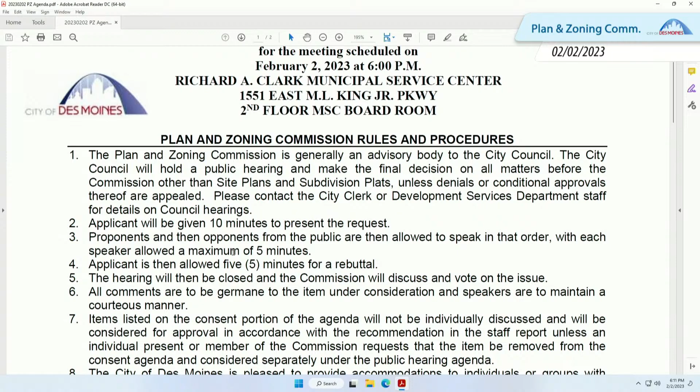Items that are listed on the consent portion of the agenda will not be individually discussed and will be considered for approval in accordance with the recommendations of the staff provided in the staff reports, unless an individual present or a member of the commission requests that the item be removed from the consent agenda and considered separately under the public hearing agenda.

Roll call. Minutes. Can I get a motion to approve the meeting minutes from our last meeting? I'll move. Thanks, Emily. All those in favor, raise your right hand. Any abstentions? Do I have to? All right, the minutes have been approved.

Now we'll go over the consent items on the consent agenda. The first item is a request from Urban Dreams, represented by Isaiah Knox, for the following regarding property located at 1615 2nd Avenue, items A through C. Is there anybody in the public that wishes to hear this item tonight? Anybody in the commission? All right, item 1 will remain on consent.

Item 2 is a request from Hubbell Realty Company, represented by Steve Moseley, for review and approval of the preliminary plat Woodmont on 171 acres of property in the vicinity of 4425 East Douglas Avenue, which would allow for development of 489 one-household residential lots. The property is owned by Darlene A. Feeney. Is there anybody in the public that wishes to hear this item tonight?

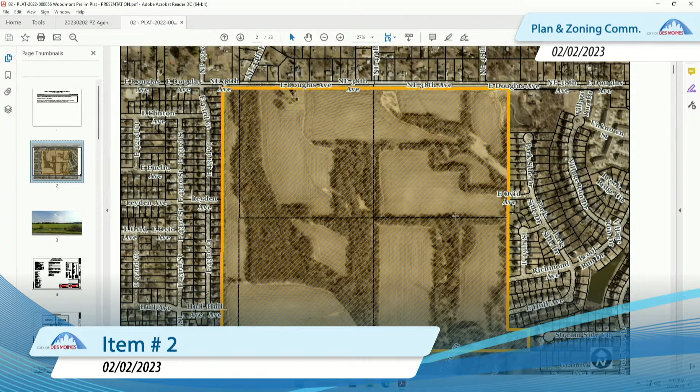This is the area, the subject property. The plat that we are looking at excludes the northern portion of the area that you see here. That's where the townhomes are expected to go, and the proposal that you're looking at right now, the plat, is for generally the rest of the area.

Again, to orient you, this is East Douglas Avenue, on the northeastern corner of the city. This is a huge area, roughly 171 acres, just to give you a scale.

Going back to the map here, most of the adjacent uses are either agricultural or low-density residential to the north. To the east is the Brook Run PUD. To the south, there is agricultural and one household residential, as well as to the west.

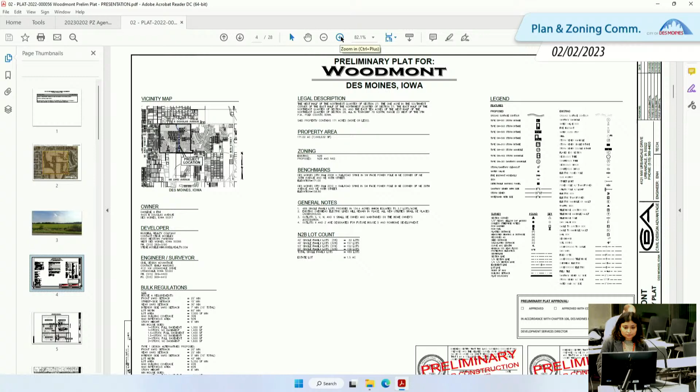I'll try to summarize here, and then we can come to specific questions about various portions within the plat. Let me zoom in a little bit. You can see there's a variety of different single-family household lots proposed. These are the lot sizes, for a total of 489 lots.

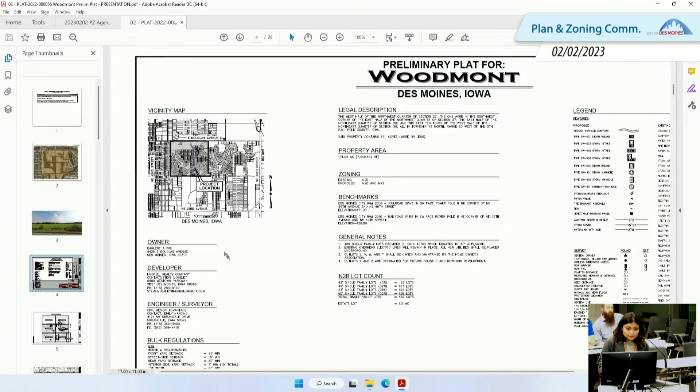This is generally the street layout and the subdivision of the properties. These are the various sheets, and we can come back to this if you have specific questions about the various areas.

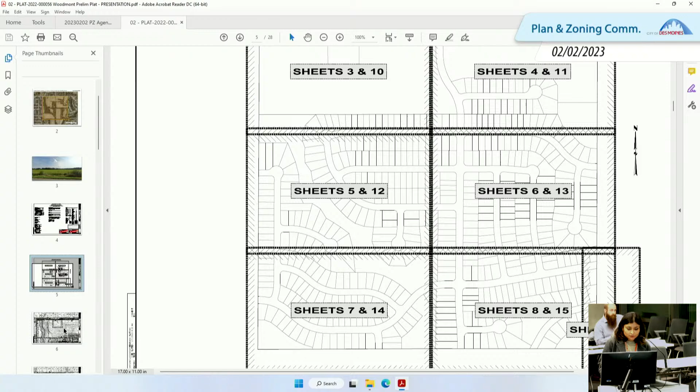As I mentioned before, to the north fronting East Douglas Avenue is Outlot Z, for the future townhomes. The Outlot X to the east is also for the townhomes. This is not what we are considering in the preliminary plat for today.

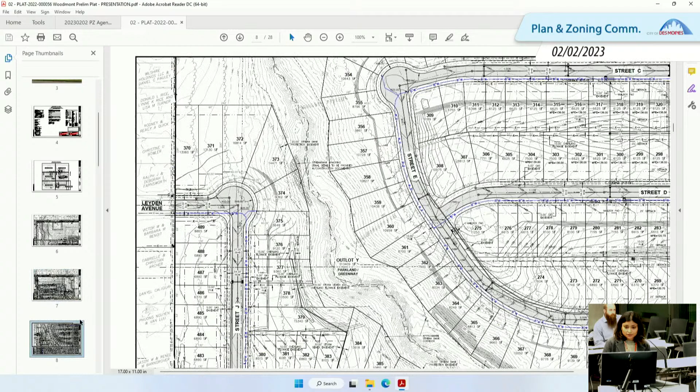It's the area to the south. Moving further, I might scroll down to the large-scale development plan, which will give us a better idea of the overall layout.

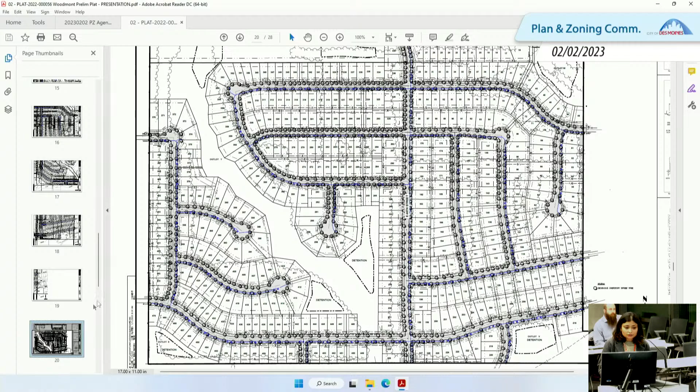So you can see the street alignment. This is Hull Avenue down here. Let me zoom in a little bit. There's a north-south connection roughly running through the middle of the site.

I think this map is actually a little bit easier to follow. As you can see here, to the north we have the townhomes, which went through rezoning and have been zoned to NX2. The area to the south, the single-family preliminary plat we're looking at, is zoned N2B.

The black dash line that you can see provides future trail connectivity, both from the townhome area as well as from the single-family residential area.

There's detention, a few different detention locations proposed. There's one right here, and again one here to the east, and then a few more to the south. The wooded area you can see right here is an outlot, mostly open parkland running along the water channel.

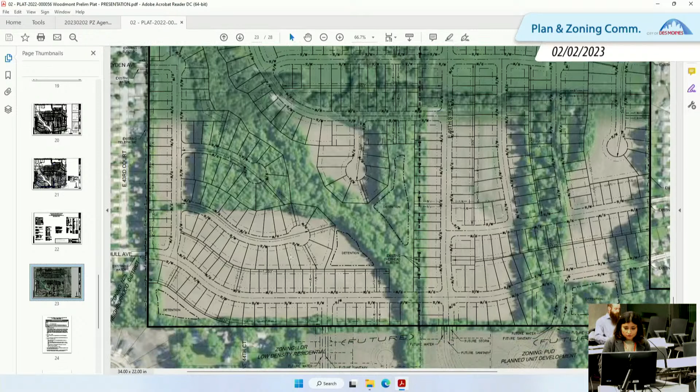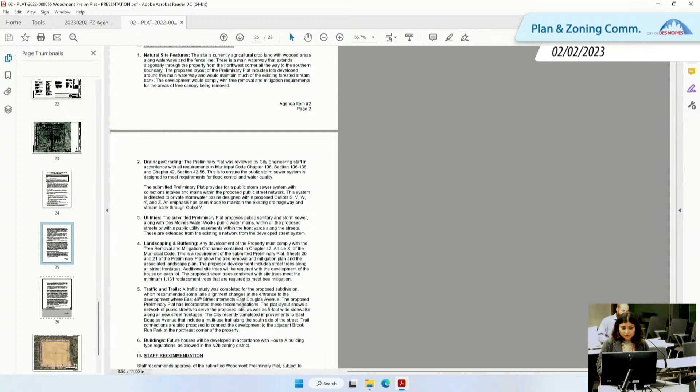With that, and the relevant zoning history I already mentioned, the northern portion of the property was rezoned to NX2 to allow the development of the townhomes. There are a few additional applicable items listed relating to drainage, utilities, landscaping, traffic, and building.

Staff is recommending approval of the preliminary plat subject to all the administrative comments.

This is the consent map. We did not receive any comments back.

And with that, that concludes my presentation. If you want me to scroll over to any of the maps, I'd be happy to do that and take any questions.

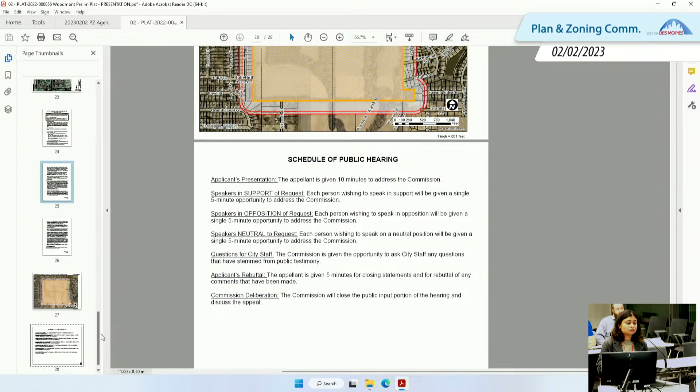Thank you, Suriyoshi. Any questions for staff? Is the applicant present?

You have 10 minutes. Please state your name and address and sign in when you're done. I will try and keep it much shorter than 10 minutes. Good evening, Caleb Smith. I'm Vice President of Land Development at Hubbell Realty Company.

Is that better? Okay, perfect. I don't have a whole lot to add. We've been working well with staff over the past couple months on this project, have made changes to try and accommodate some of their desires and some of our desires, and I think we've come to a really good project. We're really excited to get going. We are also working on our first plat, our first set of CDs. That'll be that first cul-de-sac, if you remember, that was up there underneath the townhome ground. So hopefully soon we'll have some development going out there this year, assuming that we get your guys' blessing tonight.

I'm happy to answer any questions if you have any. Yes, sir. How are you going to handle the tree cover?

As we were planning this development, obviously there's significant tree cover in through a lot of these areas. Some of the locations, there's going to be some significant tree removal. In a lot of the areas where there is terrain, drainage, or significant trees, we've tried to plan around it.

As you recall in the development plans, and maybe I can scroll here real quick. Did I miss it? There you go. Thank you.

To make this development work, to accomplish the goals that we had set initially with the rezoning operations that we did on this property, the density we've got is what is needed to make this project work. Again, all the trees we do remove, we will comply with the city's mitigation plan, and we'll be planting new trees to replace those as we go down through the road. But we've made significant efforts to try and maintain as much of that existing canopy as we possibly could on this development.

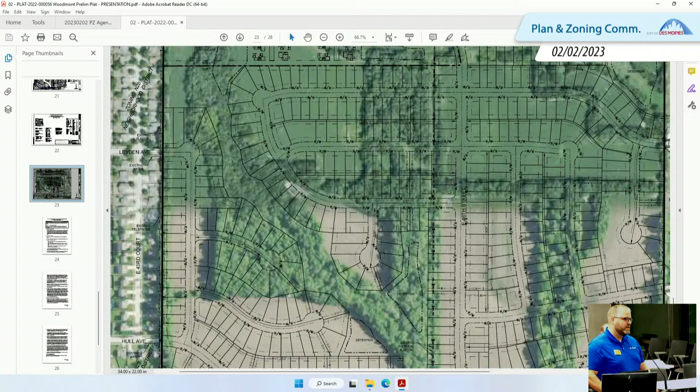What is the expected purchase price of the houses? It's a really good question, only because pricing of materials is difficult to project. In the single-family lots, I'm thinking the lowest end will probably be in the mid-300s, and obviously we'll have some houses that go up into the 400s. A lot of it depends on what customer demand is. Two-story ranches, all those can drive different values. But we're expecting that mid-3s to mid-4s is probably the playground we'll be in on this, at least the first few phases.

What about townhomes? Prices on those? At this point in time, the townhomes isn't in front of the city for approval. Our anticipated range of those are in the upper 2s to the 300 range, but we're still continuing to work on that plan. As we get more details, we'll be happy to share that, and obviously we'll have an application before you for review.

Just to reiterate, members of the audience, you will have your chance to come up to the podium and ask any questions or share your concerns. Just so you know, things that are asked and questions need to be part of the record. That's why we give you 5 minutes so that you can come up and either share that you're in favor of the project or in opposition or neutral.

Hi. Did you develop all of the houses that exist around it, specifically to the east? We did not. Will your finished product look like those, where the garage is prominent in the front? It will be. Inevitably, one of the things we propose with this development is to try and get smaller lots. We're trying to propose the smaller lots because it allows us to produce a product that is going to be more affordable to the average buyer in the market right now. So you will have garages out in the front because of the width of the lots we're proposing.

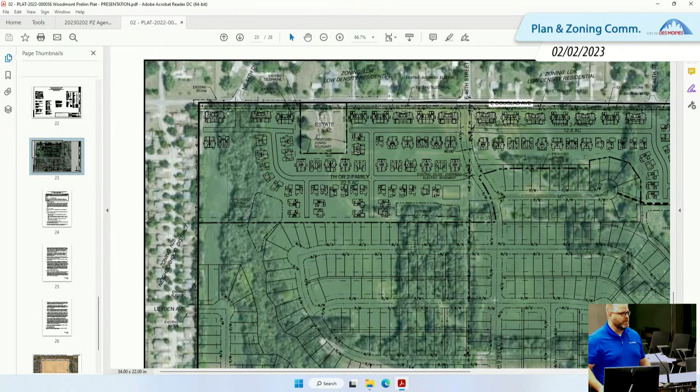Any additional questions from the commission? Any questions for staff? Actually, one.

Do you have a mock-up of what the homes would look like? And then what typical size of home is it? Are they typically like 2-bedroom, 3-bedroom homes?

Usually 3 to 4 bedroom, depending on the footprints we go with. We've got about 8 to 10 product types that we're targeting for this, though I don't have the products with me tonight. One of the things we do is continually evaluate our product and what's working in the market, so that could evolve through the different phases of development. But right now we're looking at about 8 to 10, 3 to 4 bedroom units, some ranch, some 2-story, some with 2-car, some with 3-car garages. So there's some variety out there.

Okay, and then my next question, what's the average size lot? I think I saw a couple 7,500 to like 10,000 square feet. And then how far spaced apart are they? I guess is my next question.

Yeah, so the side setbacks here, we're proposing 5 and 5 for the side setbacks, so they will be closer. Lot sizes do vary. One of the things we've noticed in the market is that if you have a different variety of lot sizes, it allows you to bring different product types, and that seems to hit the market better. Some lots will be smaller in that 7,000 square foot range, some will be 10,000, some will be a little larger than that. In this first phase, I think there's significant variety of all those.

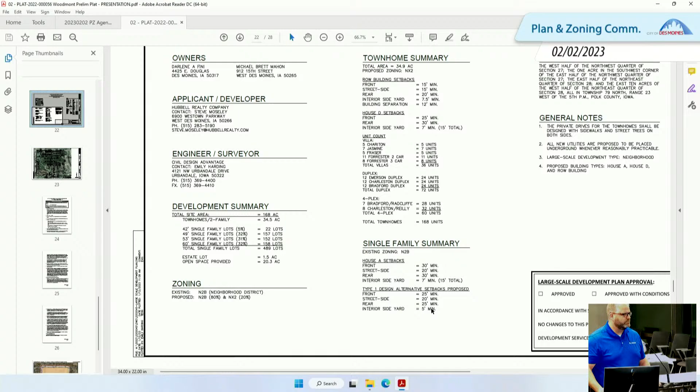Thank you. Quick question for staff, maybe. Embedded in approval of this preliminary plat, have you guys approved those modified setbacks? Yes, we have, through the large-scale development plan, which is the administrative review.

So those setbacks will really come into play when the building permit requests come in for each one of those houses. That's typically when we look at site situations - in an already developed area, if we had an infill house, we might consider relief individually at the building permit phase. But since this is a holistic development, we have the avenue to do the large-scale development plan and start looking at those setbacks early.

Does either staff or the applicant know the difference between the average lot size you're proposing and the average lot size in the development that the speaker raised? I personally don't, I apologize. I don't have those stats with me tonight.

Does staff know? No. I mean, is there a material difference? I'm just trying to look at a couple here, see if I can find a dimension. Yeah, I'm getting on GIS real quick too.

Between Lake and Bull, on my block right now, there are 14 lots, 15 because one homeowner has 2. On the proposed development in Hubbell, there are 19. My lot's maybe a third of an acre, so I'd say between 9,000 and 12,000 square feet. It looks like maybe the lots are in the width range of 60 to 65 feet. Does that sound - well, we can hear you, but nobody else can hear you.

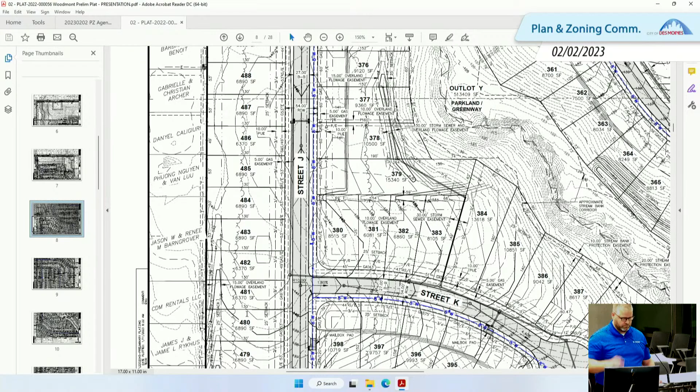Okay, and then I think my last question for the night: I was out in Grimes, and essentially it's a newer development. The houses are very close together. They're not going to be comparable to that. It looks like a really tight street. Yeah, it's hard to say, and I say that because I don't know what development you're specifically talking about.

With 5-foot side setbacks, if you build right up to the envelope, you're going to have 10 feet between the houses. It is kind of tight. There are developments out there where they are even closer than that, and I think they have firewalls in the house that they put in to allow them to be closer. So I don't know if it's one of those situations, or they might have gotten darn close, and it may be that they took the hit on the construction side to get the units even closer.

Okay, sounds good. I think that was my last question. Thank you.

Commission, any other questions for the applicant? If not, then we will close the public hearing and we'll hear your thoughts.

Yeah, can I start, Johnny? So I went to a talk recently about the housing shortage that we're going to be seeing in Des Moines, and I was a little nervous about it when I heard it. So I like projects like this because I feel like it's helping address future issues that cities like ours are going to see. So I am in favor of this, and I move staff.

Thanks, Emily. Any additional discussion? We have a motion on the table.

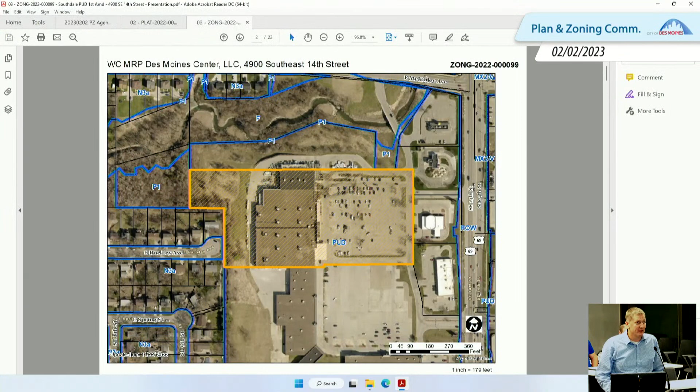Yes, Mr. Chair, members of the commission, Bert Drost, planning staff for the city. The item before you is a request to amend the Southdale PUD concept plan to allow the Home Depot store to continue to store some small storage sheds that they have for sale out in the parking lot in front of their building. The subject property is the Home Depot on Southeast 14th Street. You can kind of see, I guess the next slide is probably better, they're wanting to store some outdoor sheds in this area right here. They have about 5 or 6 of those small 120 to 140 square foot storage sheds that they sell at the store, and they're just wanting to display them out in the parking lot in front of their building.

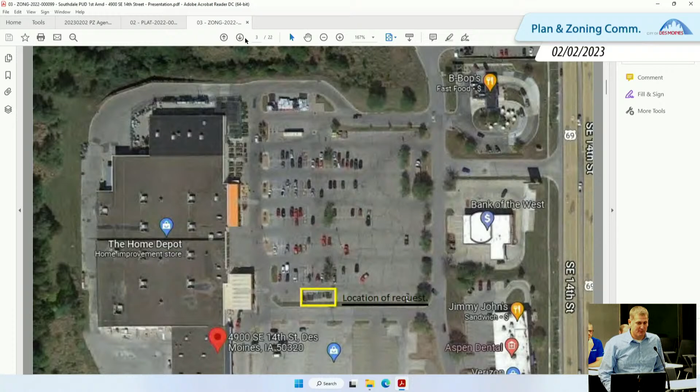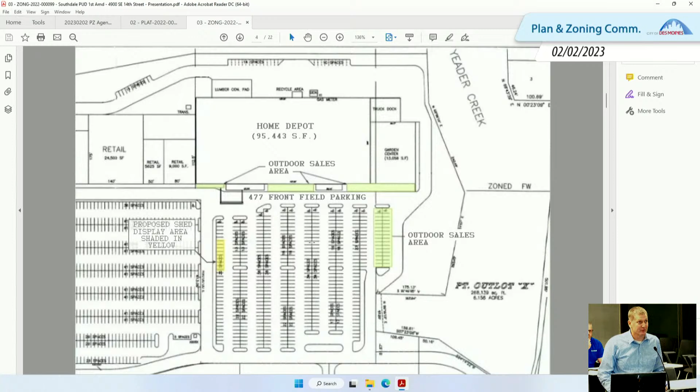This next slide here, now north is to the right. So picture where they're wanting to keep them, in this area right here that's yellow. Right now they have the approvals to store them in the green area right in front of the building, and as I'll get to in our staff recommendation, there's an outdoor area right here where they have their lawn and garden and their plants and their seasonal sales. Our recommendation is that they relocate the storage sheds to this area over here that's already approved for the outdoor merchandising. But here's another view of where they're wanting to keep them. You can see they would take up about 9 parking spaces in the parking lot. They would leave about 6 spaces here between the front of the building and those storage sheds.

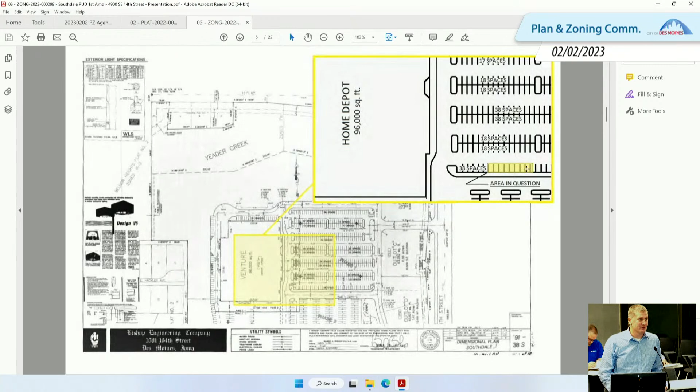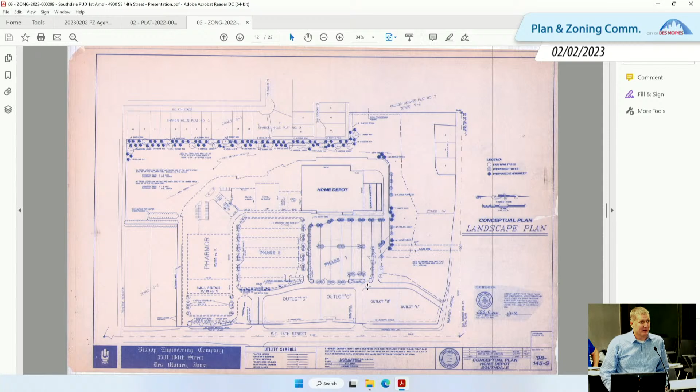So this is the PUD conceptual plan that was approved back in the 1990s. For those of you who've been in Des Moines a while, you know this used to be a Venture department store that converted to Home Depot in the late 90s. This shows the conceptual landscaping around the perimeter of the parking lot. Then this next slide here is the development plan that was done back when they expanded the parking lot to the north for that outdoor merchandising.

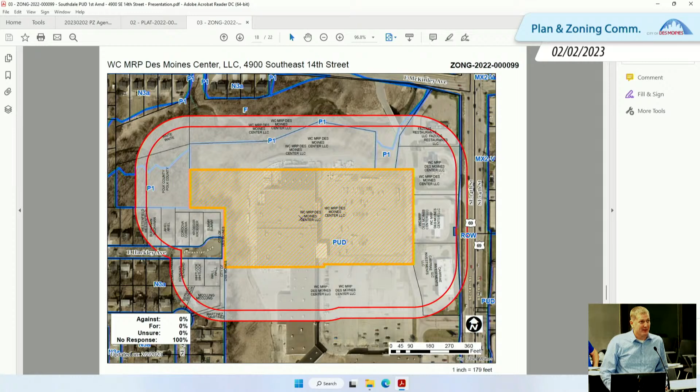Was this from an enforcement action or how did this come about? Yeah, it was enforcement action from last fall.

Any other questions for staff at the moment? Otherwise, is the applicant present? I have one question.

Bert, what's the rationale for the staff's recommendation? We just feel it looks, I guess, I don't know if cleaner is the word, but more organized to keep all of the outdoor merchandising in the same area.

If you read the staff report, we did say that if the commission or ultimately the council is inclined to approve what they're requesting, we would ask that a condition be to provide additional landscaping around the perimeter of the storage sheds, just to soften the appearance and make it more attractive. But really, our rationale is that we think it looks cluttered to have the sheds just floating out in the middle of the lot right now.

Can you scroll back to the pictures, please, Bert? Sure. Thank you.

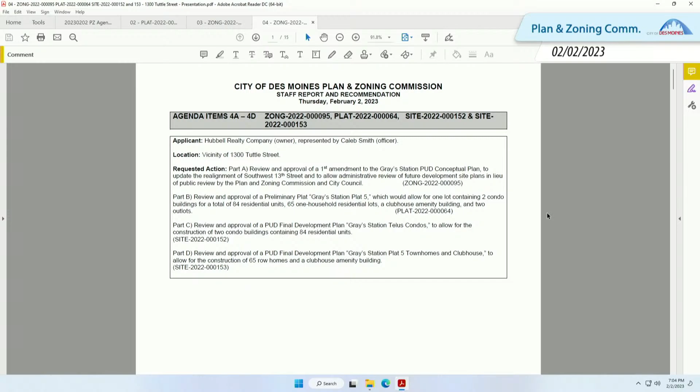Thanks. Chair, members of the commission, Nick Tarpey, planning staff. So as you probably saw in your packet, pretty big item we got here tonight. It's one item, but we got 4 sub-items basically wedged within that. Part A strictly relates to the PUD amendment. The property we're looking at tonight is within a PUD, planned unit development, so it follows a little bit different zoning patterns and zoning approvals than a lot of the other stuff you guys see that follows most of the Chapter 135 stuff.

Part B is for a plat. We talked about another plat earlier tonight, very similar. That's just to divide land, some new public streets. I'll show you that. And then part C and D are two kind of jargony terms, but final development plans, basically a fancy way of saying site plans. So there's 2 site plans, a plat, and a PUD amendment up for approval tonight. I'll try to walk through all those and wade through it and tell you what we're talking about, and also try to keep it concise and not get lost in the weeds at the same time.

All right, so the area we're looking at here, this highlighted area, is the area of the PUD. This is the Gray's Station PUD, south of MLK, north of Grays Lake, a larger PUD area. Sub-item A deals with amending the layout of the PUD, but also the review and approval procedures. But specifically, the items we're looking at tonight, the plat and the development plans, if you can follow my cursor, are really concentrated in this area of the PUD. I'll go slow so you can understand what we're talking about. It's not the entire PUD, it's just a sliver. This is a phased, large-scale development, and we're just talking about this one phase here tonight.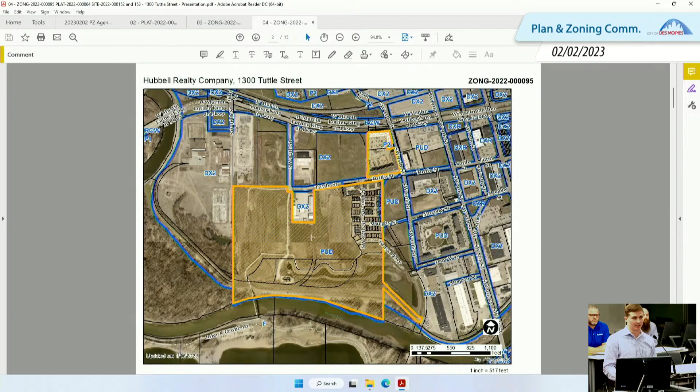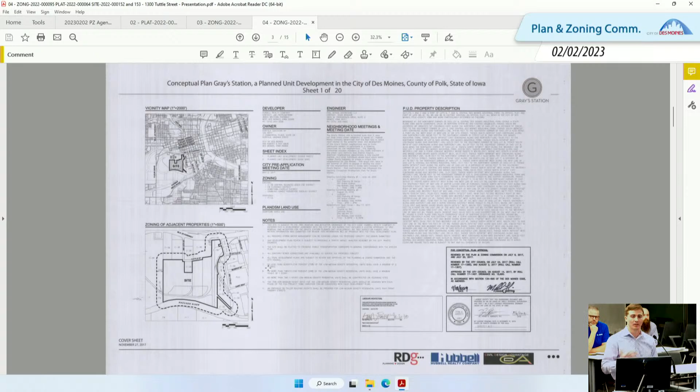This is a cover sheet of the existing PUD. It's a recent PUD, relatively prescriptive, approved back in 2017 and finalized. What the applicant is proposing to staff is to strike out one of the provisions, provision number 6, to waive review by the Plan and Zoning Commission and City Council for all final development plans or site plans. We'll go back to that later.

This map here is a large-scale schematic overview of what we're looking at tonight. I really like this map because it highlights phase 1 here, which is already platted and under construction. This area, highlighted with my cursor, is what we'll be reviewing here tonight.

One of the development plans is outlined here with these two larger buildings, two large three-story condo buildings, about 84 units, with parking areas behind. The rest of the development involves an extension of both public streets and some private streets and pedestrian pathways, as well as some amenity spaces. If you follow my cursor around, there's a clubhouse, an amenity space for residents, some green spaces, and program spaces like a pool, a dog park, and pickleball courts.

So we'll come back to this image, but from a high view generally, think about extension of some public streets, some private alleys, building of some new townhomes, and a couple larger buildings for multifamily residential type development — really just an extension of what's already there.

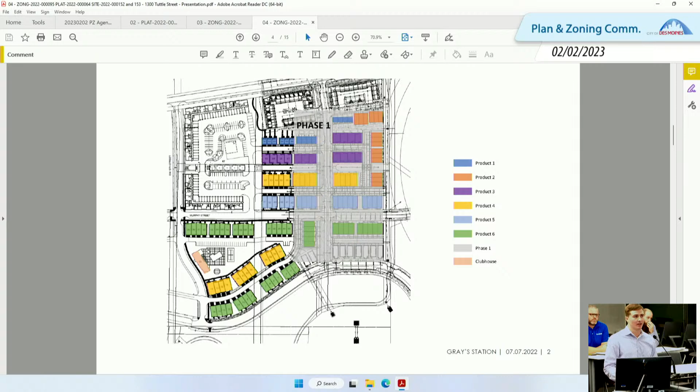Here's just a little bit more of a detailed view, providing some landscaping and showing some pedestrian linkages. I'll linger on that for a second.

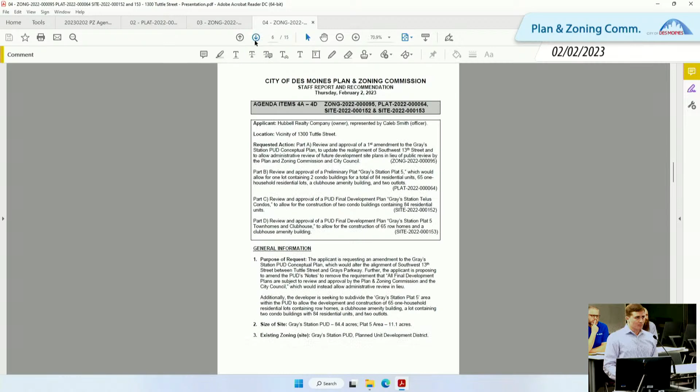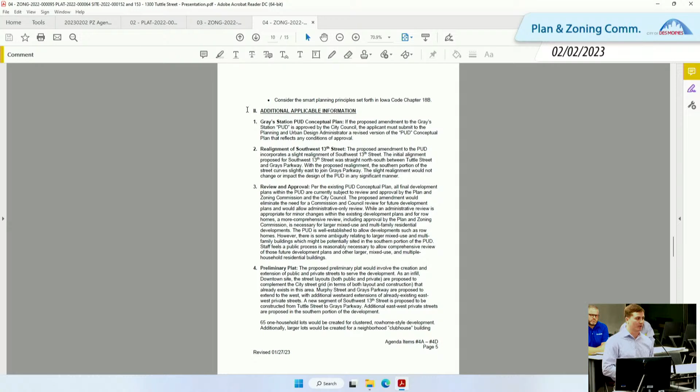Digging into the staff report, in terms of the plat and development plans, the applicant has been pretty good to work with, and they're pretty much in agreement with all the staff comments. Staff is recommending approval of both the development plans for the townhome style development and the larger scale multifamily development. There are some administrative conditions regarding labels and final design elements we want to see in some buildings, which the applicant has agreed with. Staff didn't have any concerns with street layouts, utility connections, or things of that nature.

Regarding the requests to amend the PUD, the first part was to slightly amend the alignment of Southwest 13th Street, which frames the development on the west side. It would be a new public street; the concept plan called for it to come straight down and T-intersect into Grays Parkway. This revision shifts it slightly to create a cleaner intersection with Grays.

The other part of the applicant's request was to amend the review and approval process of the PUD. Currently, as shown earlier in provision number 6 on the cover sheet, all final development plans are required to be reviewed by both the Plan and Zoning Commission and City Council. It doesn't really distinguish between the scale of the plans or what exactly we're looking at. As staff, we took that request in and worked with the applicant to find a middle position.

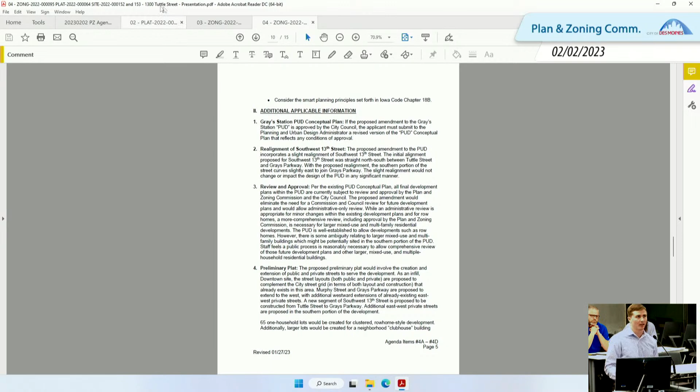As staff, our recommendation was, especially with a lot of the row home style development seen around here, that we have a development rhythm established and product types the applicant will be using repeatedly. Staff is comfortable with the design and layout of those. Any new row home or townhome style developments coming through here, staff is comfortable administratively reviewing those — they don't necessarily need to see the commission. The same goes for any amendments to previous development plans, such as a slight layout or use change, which staff felt was appropriate to review administratively.

However, with some of the larger developments, maybe a large mixed-use or large multifamily style development, there's still some ambiguity with how the PUD is going to develop. As we saw on the maps earlier, it's a pretty large area with a couple more phases coming. Given that uncertainty, and the scale and nature of that development, staff still felt it was appropriate to recommend at least Plan and Zoning Commission approval, just to get that through the public process.

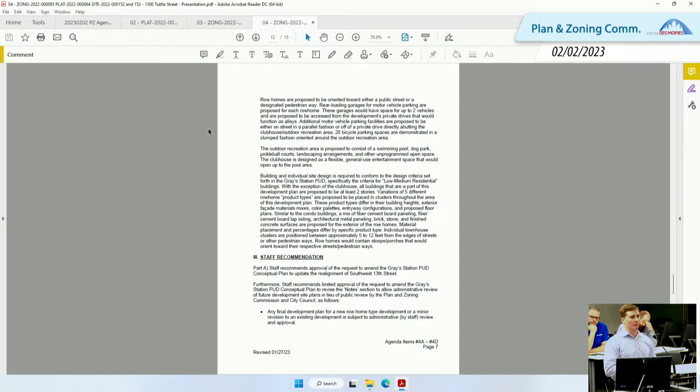Another important thing to note is staff is not recommending City Council review of all this. Staff's position is really to streamline the review and approval process for new site plans within this PUD, very similar to how we do it now - administrative level review, with a lot of the larger projects going to the commission. If the applicant isn't in agreement with the commission's recommendation, they'd always have the opportunity to appeal that to council, but it's not necessarily required for them to go to council.

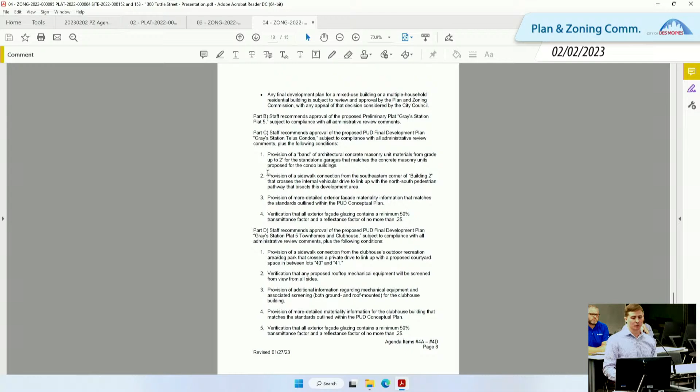So digging into the recommendation here, part A really just summarizes what I just said. Generally, staff is in support of both the plat as well as the development plans, with some of the conditions that you see outlined here.

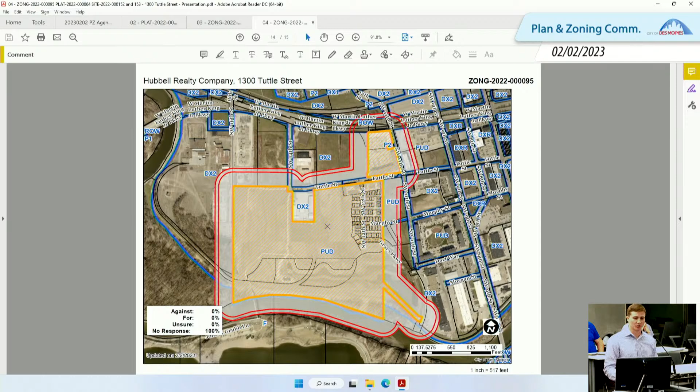This is the notification map. There was a PUD amendment, so the applicant was required to notify everybody within this area and have a neighborhood meeting - I'll let the applicant describe that. But we didn't get any other comments, phone calls, or emails about this. That concludes this, and I'll take any questions.

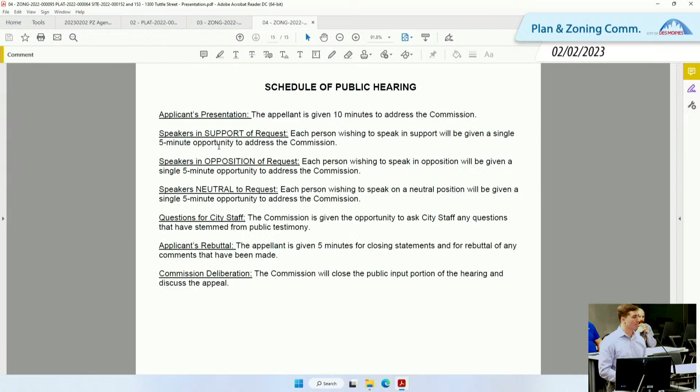Any questions for Nick? How large is a 'larger project' versus a smaller one before it comes here? The language we use is larger multifamily projects as well as mixed use projects. Any single household residential, like townhomes or row homes, or an amendment to an already approved site development plan, would be administratively reviewed. But a multifamily or mixed use project with new construction would be brought forward for the commission.

Are there any requirements, concerns, or risk with respect to connectivity? For example, this is a large area with a single developer - in other places a single developer will do a single deal with one connectivity provider, which reduces quality, reduces competition, and prevents potential future expansion. Is there anything here that ensures that isn't baked in, or any concern being looked at that would affect opportunity to make sure this area has good access to broadband?

That has not been discussed as part of the plat process. That would come up when they're laying out the streets and things like that. Well, I thought you mentioned something about utilities - sewer and water is what I was referring to specifically. So no connectivity, conduit, or anything with respect to broadband or fiber is within the scope of what we're discussing now? Correct. So we'd have the same future undergrounding risk right now because we haven't considered it?

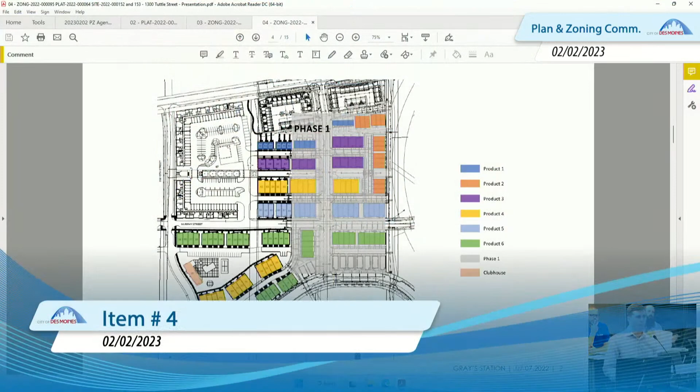I guess we don't have the full PUD. No, that's not in the PowerPoint. Okay. I guess the PUD as it exists today already establishes a layout, and we're going to switch over to the document camera. Maybe they have it.

This layout represents what the entire PUD conceptual plan encompasses.

So when this first came through, we established the road network and generally the different development typologies, whether it's mixed use, multifamily, or the row home style product.

But there was a lot still to be discussed as to what the buildings look like when this first came through. So as part of the zoning, at that point, we had a condition added that the council added with their action, that said development plans or site plans will come in for review at P&Z and City Council.

And since that time, a lot of the row homes have been built. Mixed-use buildings up by MLK have been constructed. We have a couple buildings on Tuttle. So we're starting to get a sense of the project and the development pattern, and the applicants request us to take a second look at that condition.

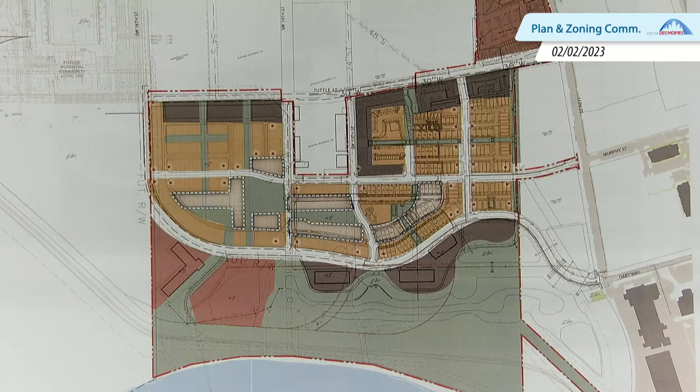Yeah, that makes sense to me, Jason. I just wanted to be clear that this only applies to Gray's Station as a complex project, as it were, rather than in the future for other projects in other places across the city.

Thank you. I have a follow-up to that, Jason. When you talk about the row home developments, is there a threshold that will be administratively approved under the current recommended staff action, or will it be any row home development?

The answer is, if the staff recommendation is adopted, none of the row homes would be reviewed publicly. They would all be reviewed administratively.

So if we have, on the west side of this picture in front of us, 10 or 15 row homes connected, the Plan and Zoning Commission will not look at it based on the recommendation. That's correct.

How would you administratively - I mean, how different is different? Often you'll come in, here's the exact same plan, we get the same box over and over and over, right? If we're saying it looks like the exact same box, I could just move that plan down there. We're saying, all right, it's the same box, same drawings, curved a little, slightly different, we're good. Is there a thought on how different it needs to be before there's a challenge, or is that not thought about yet, or we're just saying, row houses, row houses?

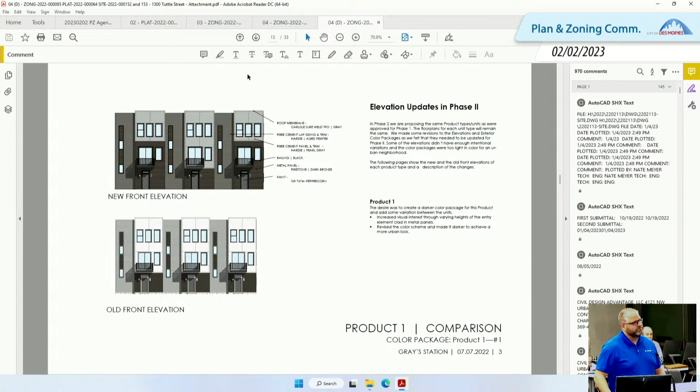It was very interesting to me to see that you tried to emphasize verticality, and I can see that in the downtown - that makes perfect sense to me. But the business of changing the colors, that remained a question to me, and now you've kind of explained it to me - it's the market. And I apologize, I am giving it to you at the high level that I have of the information. We have other folks on our team that could give you way more detail on that if you're interested. But it is intriguing, and we're hopeful it works.

Thank you. Anyone else? Carol? Hi, could you just give a breakdown of the buildings and the ownership type - are all of these rental units? So, all the townhome units you see colored in here, with exception of the brown building on the lower left-hand side which is our clubhouse, all the other units are for-sale product, so they have their own lot. They're fee simple individually? Yep, absolutely.

The area that's in white, kind of in the upper left portion, that's our Telus project. That's also owned by individual property owners, it is not a rental community. Now, can someone buy it and rent it? Absolutely, they have that right if they buy it, but it is not intended to be a rental community, and we do not intend to run that as a rental operation.

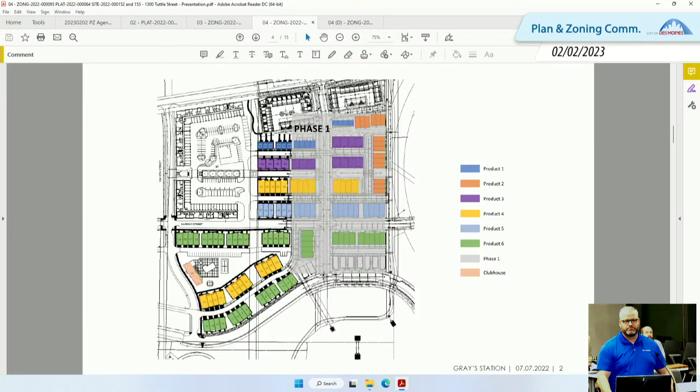So none of this is rental? Not in this phase. And we're in phase - not one, but black and white, right? That's what we're talking about? The black and white, and then the extension, brighter colored stuff to the south of there. Yes, ma'am.

Did I read somewhere there was going to be an 8-story building, or was I delusional on that? Michael, I don't believe we had an 8-story building in our project. And Z? Well, that's future phases. I think Y and Z, isn't that down by the Greenway?

Yeah, I would say it's very early in that process. We actually just started conversations about what that space can look like, size of the building, all that stuff. Give us a little time, we'll come back.

So that's not in scope? No, ma'am.

Okay. There were so many sheets, and I took so many notes, it was unfortunate. I didn't quite understand what was in scope and what wasn't. I printed everything we submitted to staff for this meeting to have it ready, and I was like, I'm not going to kill 10 trees tonight. You know what I mean?

Yeah, rock on. So I have another question about parking, which is my favorite question. So the row homes all have their individual 2-stall parking, right? Correct. This multifamily, when you say multifamily, what does that mean to you?

Well, maybe I'll have Michael Bialis come up. He works with our development team, and the way we split our world up is my job is to get the ground ready for people to start building up. His team is one of the teams that helps do our multifamily projects. I'll ask him to come up, and he'll give you some better answers.

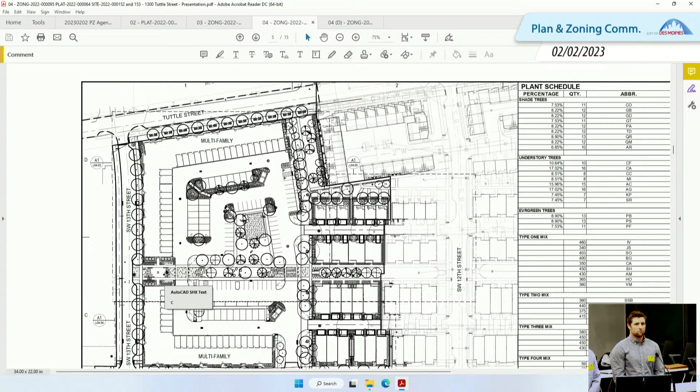One last question. Is the goal for these units to be able to apply for tax abatement? Yeah, it's part of the plan for both Tuttle as well as the townhome projects is to apply for tax abatement. Obviously there are requirements to do so, and we're intending on meeting the necessary requirements to meet that. And staff can correct me if I'm wrong, but I believe there are some requirements when it comes to tax abatement as far as sustainability and EV chargers and whatnot. Is that right?

So yeah, they do have that requirement. There's specific requirements within what's called the River Point West area of downtown. They have to follow the second urban revitalization plan. I believe the tax abatement criteria they're trying to get includes proximity to a DART line and a 50% increase in required landscaping. There's a couple other ones in there. I don't know, that's something we're still working out, but basically it's different tax abatement standards than what exists now.